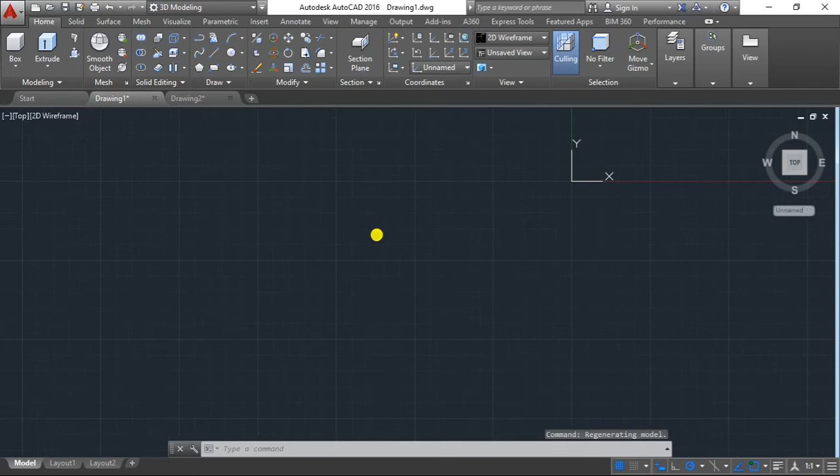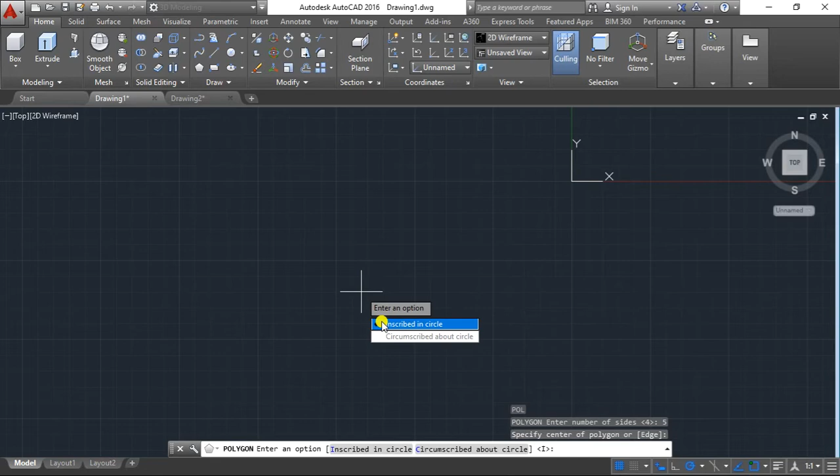Let's say gagawa tayo ng polygon. So type polygon and then enter the number of sides. Let's say we want to extrude a regular pentagon, I mean. So specify the geometric center, then we want to have it an inscribed circle. So assuming radius of 5, so ito na yung ating pentagon.

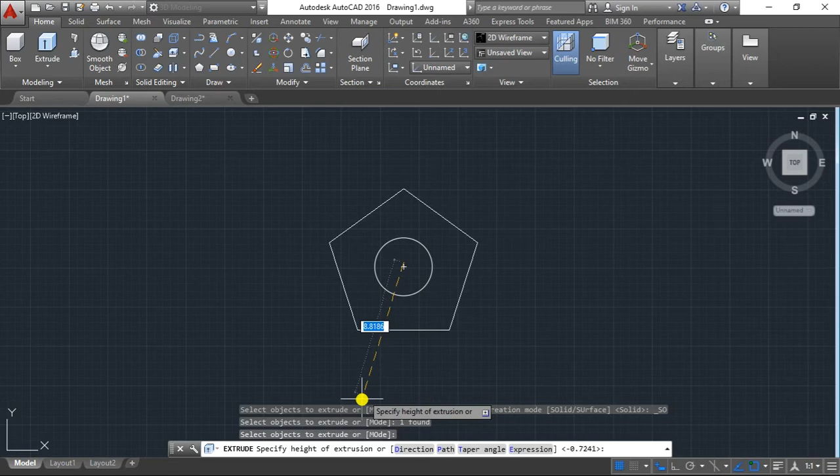So you can press here, then meron dito select object to extrude or mode. So explore muna natin yung pag-select ng object. So let's say yung pentagon lang. Okay? Yung pentagon lang. Okay, so once na-select mo na, hit space or okay, and then next is mag-specify siya ng height ng extrusion. So, kung gusto mo yung path ng ating extrusion is pa-outward sa ating working area, so pa-outward, that is towards us, towards your face, kung nanonood ka ngayon, so yun na yung ating direction ng ating height.

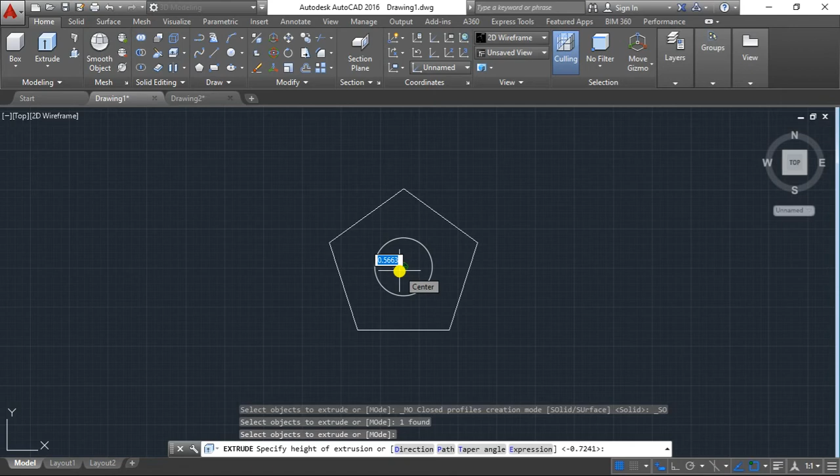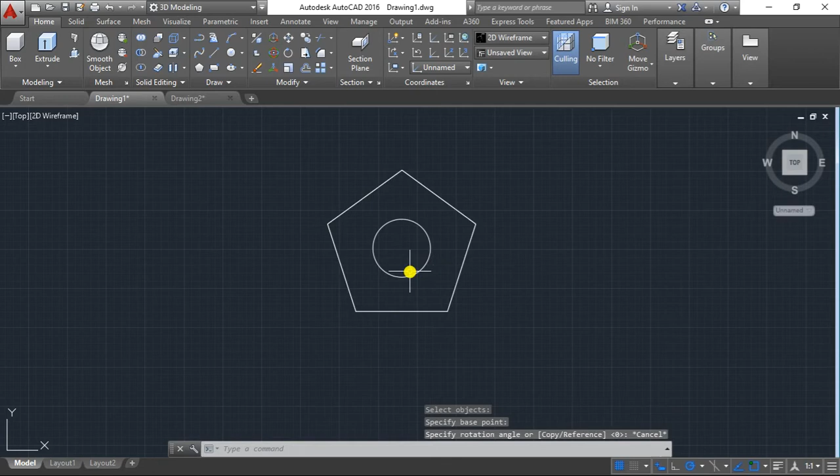So, let's say our height is 5 units. So, para makita mo, para ma-visualize mo, so again, i-rotate natin or use this orbit. So, ito yun, nasa modify. I-press mo to 3D rotate. Click mo tong 3D. And then, hindi pala yan. Actually, you can use here. You can hover your cursor on the view cube and then, i-long press mo yung left click ng mouse mo, so mag-hover na yan.

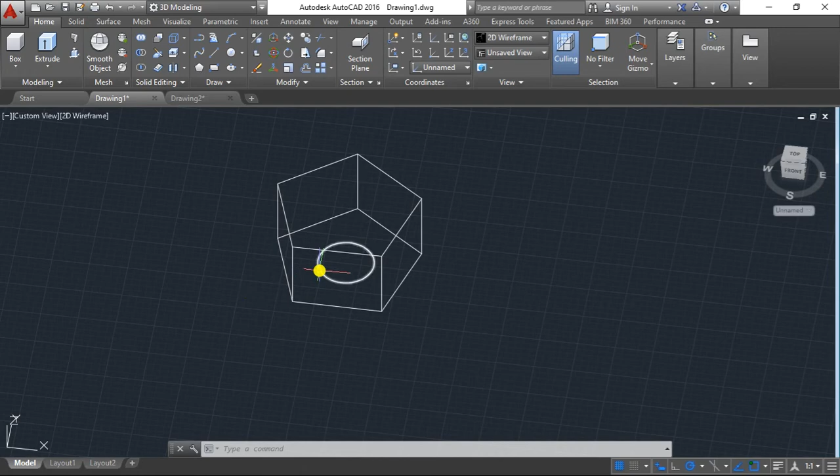So yun na. So kung makikita natin, hindi pala nasali yung ating circle kasi distinct lang yung extrusion. Hindi pwede na kapag i-click mo to automatic na mag-effect agad itong circle. Since hindi natin pinili yung circle, hindi din siya ma-extrude. And to further visualize that one, ma-change natin itong visual style into realistic. So, ito na yung naging resulta. So, yung entire pentagon yung na-extrude. Meaning, nabigyan na siya ng height that is 5 units. Okay? So, yan lang.

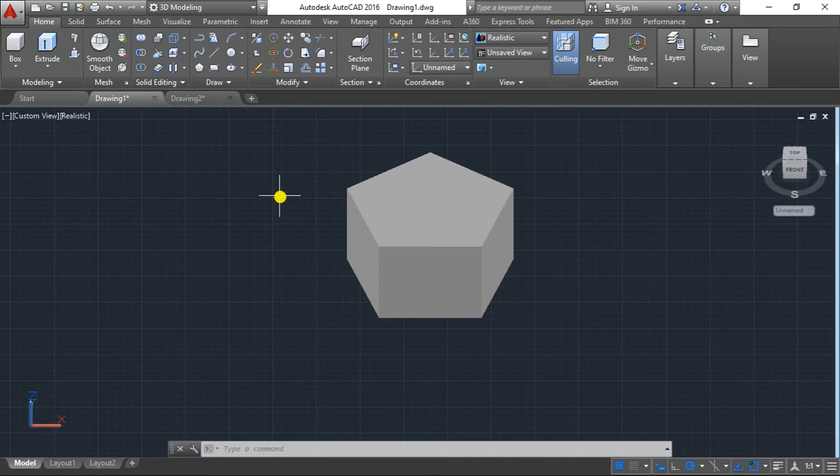Again, pwede ka mag-create muna ng 2D model mo sa drafting and annotation na workspace and then i-change mo agad into 3D basic or 3D modeling and pwede mo na yan ma-extrude, or you can directly create your 2D drawing dito na sa 3D modeling na workspace setting or workspace mode. Okay, so yan sa extrusion.

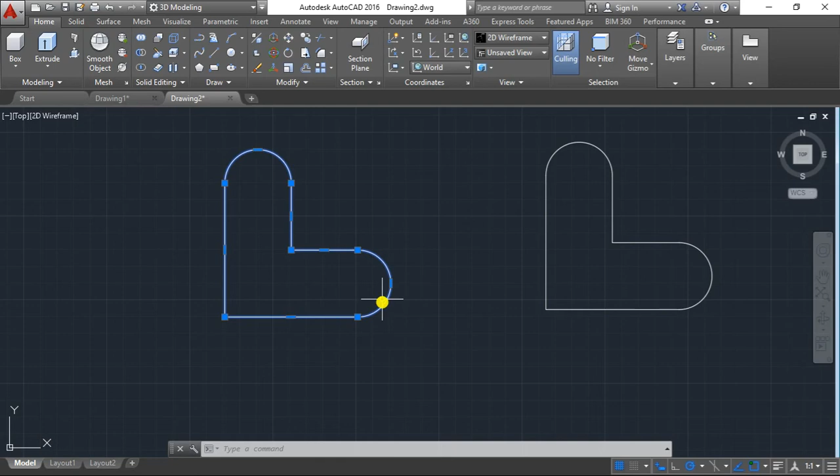Now, next is ipapakita ko sa inyo yung dalawang possibility ng ating extrusion. Diba? Sa left side is yung entire object talaga yung nabigyan ng depth. Now, sa right side yung nagiging output is hollow siya. So, here, we have two 2D drawings sa left at saka sa right. Now, sa left side ito ay isang solid na object. So, kinecreate ko to using polyline, para ma-solid talaga siya. And sa right side is individual lines. Meron tayong horizontal lines, merong arcs, so on and so forth. So, meaning naka-broken siya yung sa right side.

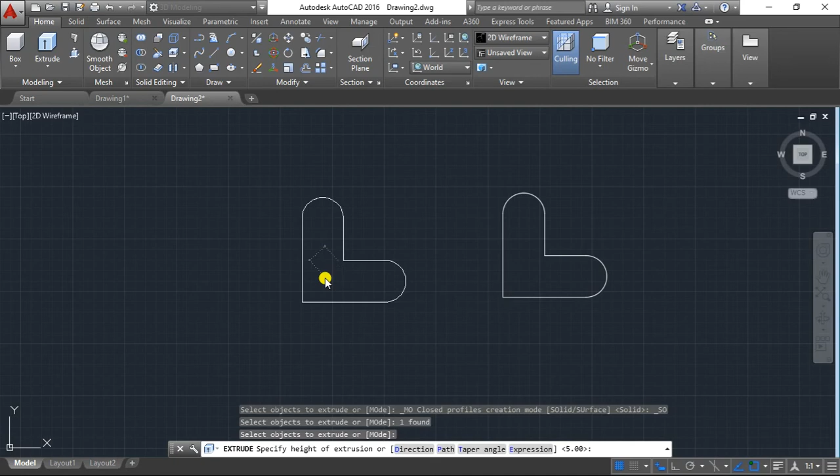Now, let's compare kung mag-match ba yung resulta niya dun sa pinipresent ko kanina. Okay, so apply extrusion for this 2D drawing. So, extrude, click this one, and then press space, then specify the height, let's say 5, and then that's it, na-extrude na natin to. Hindi pa natin makikita. Mamaya na lang. So, ito din, i-extrude din natin. Click extrude, select object, highlight natin to, kasi individual siya, and then specify the height, let's say 5, same sa kabila, and then dito na natin malalaman kung saan dito yung solid, or saan yung hollow. So, i-change mo into realistic.

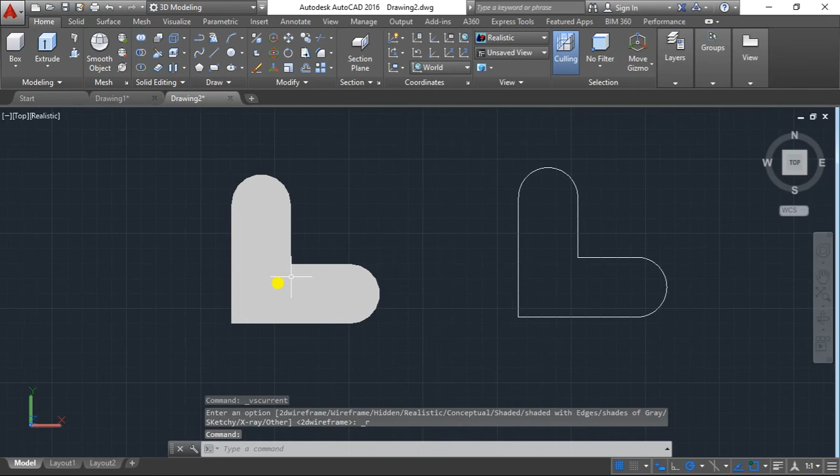So, dito makikita mo, may kulay, dito, wala. So, meaning, may hole pala. Now, kapag i-rotate natin to, navigate your cursor on the view cube and then long press the left button of your mouse. So, ito na yung nangyayari. Meaning, sa left side, meron siyang depth kasi naka-join yung object line. Whereas sa right side, yung object line, naka-disjoint siya. So, yung length lang yung na-extrude dito, hindi yung plane. Kasi sa left side, plane yung naka-extrude, dito line lang yung naka-extrude, kaya hollow siya, para lang siyang wall.

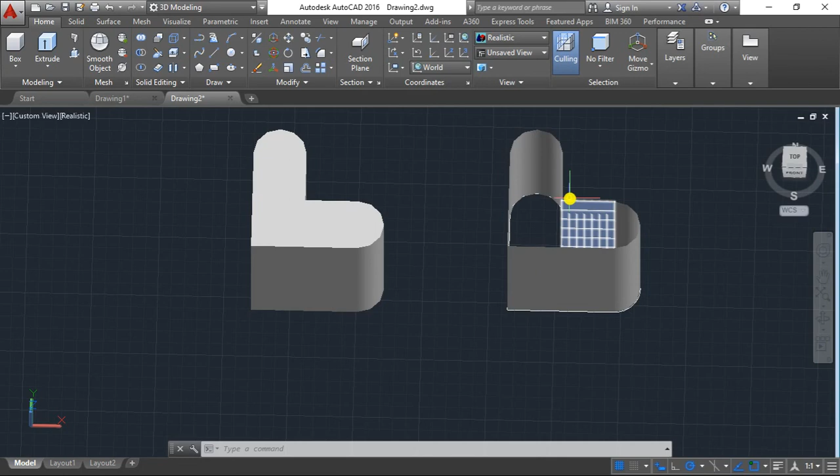So, ito yung tatandaan nyo, kapag during laboratory exercises for 3D, baka ma-meet nyo to na situation. So you now have an idea kung paano siya i-solve. Okay, so that's it for our extrude command, and God bless us all.